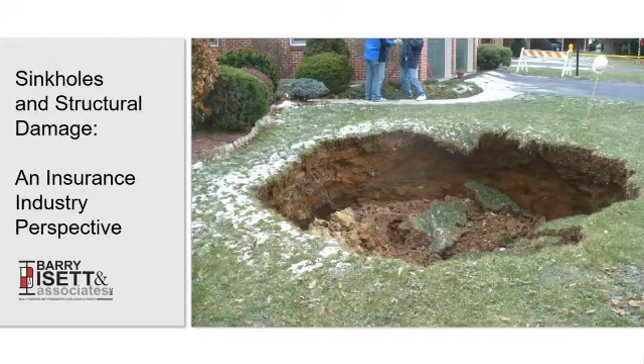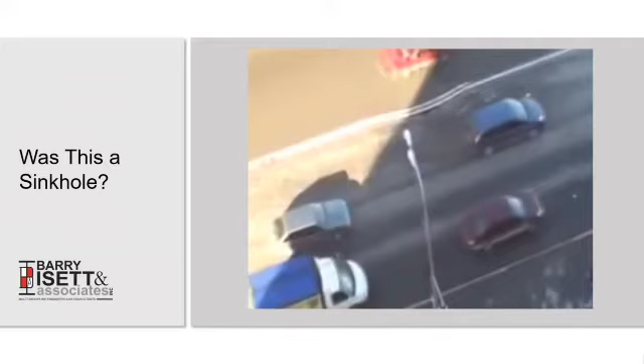The big thing with misinformation is you can see lots of videos and lots of people saying 'this is a sinkhole,' or news reports saying this is a sinkhole, but was it actually a sinkhole? I just saw today on the news in my hometown of Pittsburgh that a sinkhole opened up and swallowed a bus, but was it really a sinkhole? I don't know. We're going to go through a couple of quick videos of some things we see live and in person opening up, and just try to understand: is this thing that's occurring actually a sinkhole opening, or is it some other kind of thing going on?

You can see on the roadway there the depression starting to open up, and the car right next to it very wisely getting out of the way, probably honking its horn to try to get the other cars out of its way. So was this thing opening up actually a sinkhole?

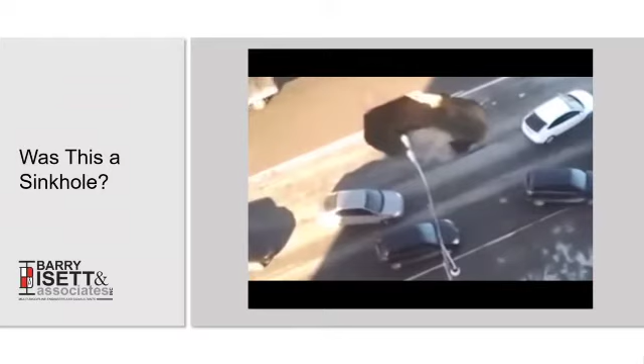We're going to go through some causation case studies later in the presentation to help you understand if these fantastic looking things are sinkholes or aren't sinkholes. The next one we're going to see has a little bit of audio. I hope it comes through, but if not, you can see this was in Baltimore, and YouTube said that this was a sinkhole.

So yeah, between the two of those, one of those was not a sinkhole and one of those was a sinkhole, despite being presented through news reports and online as being actually both sinkholes.

Generally, this is a sinkhole definition that we use. It's pretty important to understand that your policy language may differ from this, but this is the geologic definition, and this is what we've been using for years to determine whether or not we are dealing with a sinkhole or some kind of other subsurface problem, which could be caused by any number of things. So it's the surface expression of subterranean collapse and/or soil movement caused by the dissolution of carbonate rocks such as limestone or dolomite. Some policies may only say limestone, some may say limestone and dolomite, but the big thing is that carbonate rock part.

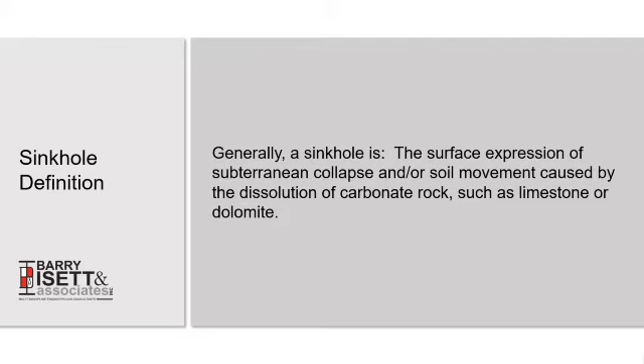So where do we find this limestone and dolomite rock? This is just a map of Pennsylvania, but you can imagine that this extends on down through into Maryland, West Virginia, up into New Jersey, and then some into Delaware. But you can see that there are quite a few bands across the middle of the state.

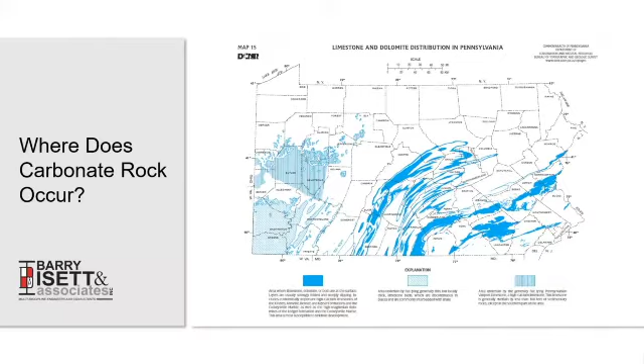You can also see the area I was talking about earlier in Pittsburgh, said to have a sinkhole - that area is underlain by flat-lying, generally thin but locally thick limestone beds, which are discontinuous in places and are commonly interbedded with shale. So in Pittsburgh, it could absolutely be a sinkhole, but it's much more likely to find those kinds of formations whenever you run into the areas where you see the darker shading on the map, which is definitely limestone, definitely dolomite, and usually pretty close to the surface, which can cause sinkholes.

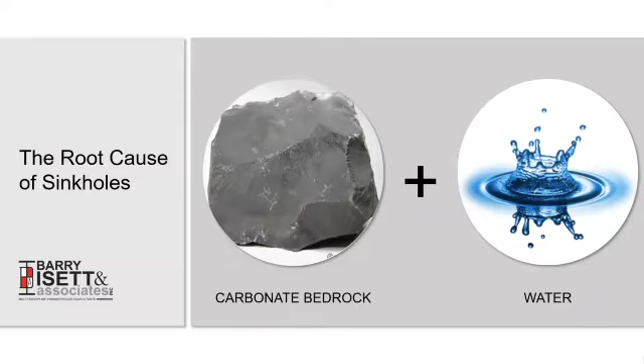So again, what we talked about earlier is the two things you need to cause a sinkhole: first is a carbonate bedrock, that's the limestone and dolomite, but to actually get it to dissolve you need the water - that's what actually opens these caverns under the subsurface. So these are the two pieces we are looking for whenever we're trying to say, okay, what caused this feature to open? First, we have to find out if there is actually rock there, and then we're going to look at what our potential water sources are.

Both of those features can cause water to move through the rock in unique and novel ways and find areas where it might want to pool and start to collect. That's usually where you start to see the formation of sinkholes or caverns - areas where this water wants to pool and collect, and it can slowly dissolve over many years, sometimes thousands of years, to cause openings in the rock surface and then cause the sinkhole on the overlying soil burden.

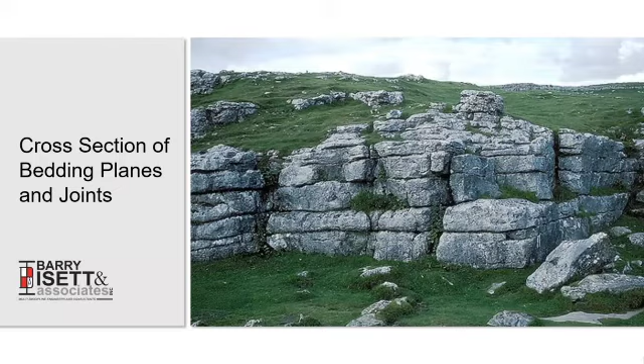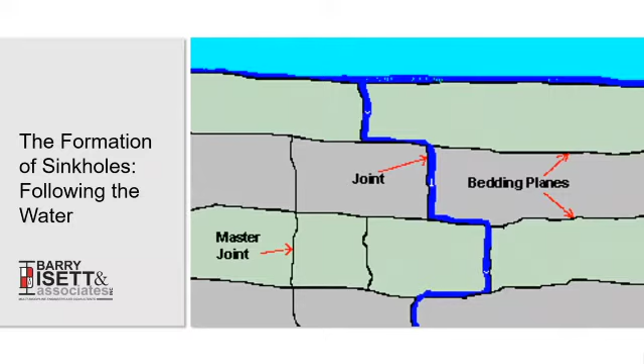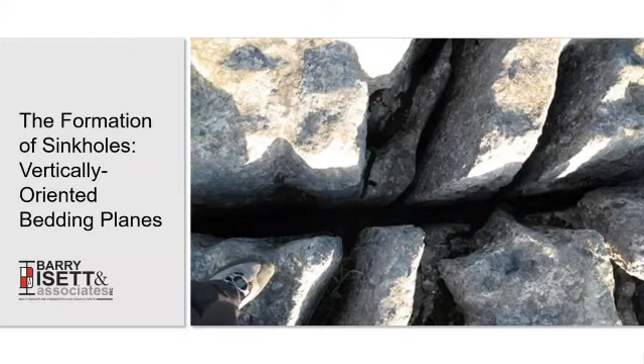So it's not always very simple in which patterns the water is going to find its way down into the subsurface. So you have to be very careful to understand that it's not simple once you get underneath the Earth, which way the water is going to go.

So what is the sinkhole that we see at the surface? The very classic definition where most people think, oh, I know what a sinkhole looks like - that's the dirt that's disappeared into the earth and it opens up that circular depression. And I know what that looks like at the surface. Well, that is what occurs whenever you have soil piping.

But the more sudden event that happens at the surface is soil piping has collapsed the soil down through these networks, through water flow down into that cavern. So that's kind of what we typically see as the end result of a sinkhole. It's not that the soil is the sinkhole, it's that the soil has disappeared down into some cavern feature that has opened up in that carbonate bedrock.

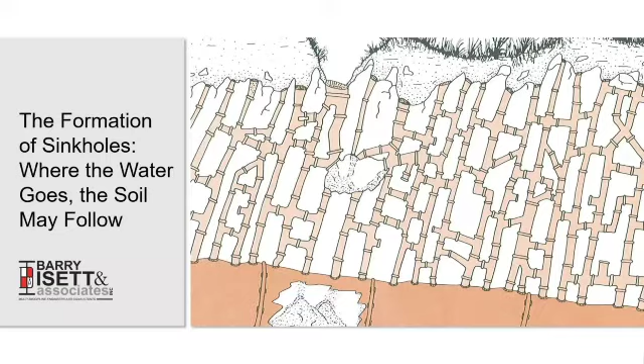And once they start to form, those things are kind of a self-fulfilling prophecy. As they collect more water and dissolve and soil pipe that water down into the cavern, they start to form more of a bowl at the surface. And then when they form more of a bowl, some depression, more water gets attracted there, and it pushes more soil through that soil piping mechanism down into the cavern and makes it even bigger.

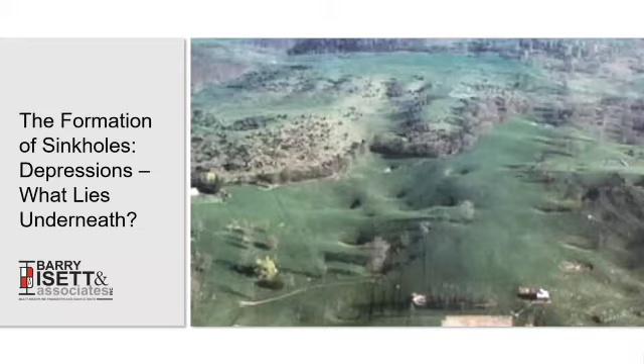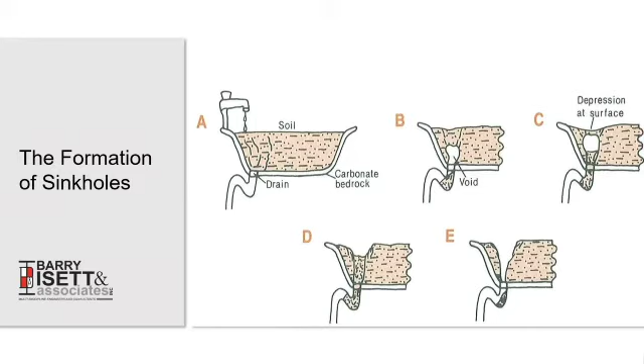Originally there's nothing wrong at the surface, you can't see anything. In B, you start to see a little bit of a depression, maybe something's going on underneath. In C, there's definitely something going on, and this depression is growing quickly. In D and E, that's where you might finally get the insurance claim, I have a sinkhole. So A, B, and C might happen over 3 or 4 years, and then D and E happen suddenly. All of a sudden you definitely have a sinkhole, and they put in their insurance claim.

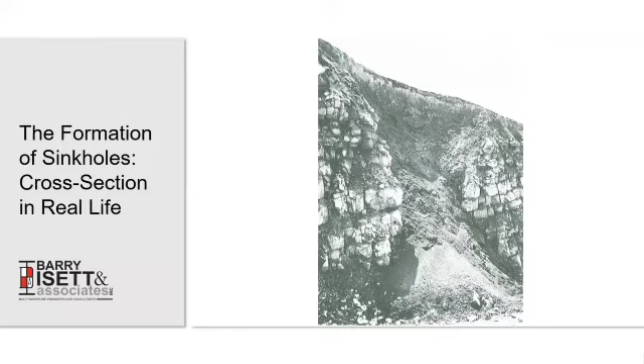For no other explanation, you'll just see an untended portion of a farm field. It'll be nice farm field everywhere else, and then somewhere in the middle there's just brush and maybe a couple smaller trees, and they just don't farm in that area. That could be that there was a sinkhole there and they just weren't able to farm it, couldn't keep the soil to stay there, it was always washing out, so they abandoned that small portion of their field. Something to look around for, especially along the Route 222 corridor or Route 78, those areas are very prone to sinkhole activity.

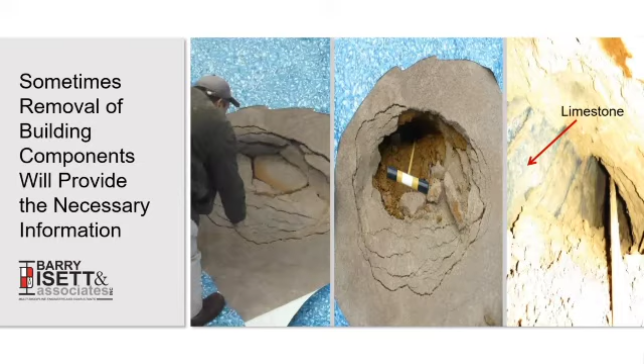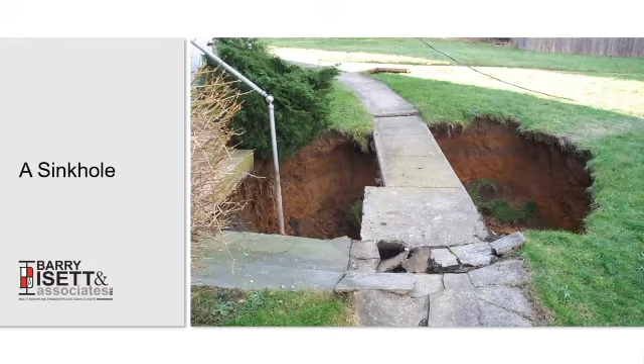So we're going to scroll through a couple photos of jobs that Barry Isett has done over the years, just very classic looking sinkholes. It's really important to remember that not everything looks classic. Sometimes things are hidden, and we're going to get into that a little bit with some case studies when they don't look so classic. But these are some of the worst ones that we've come across over the many decades that we've been doing this work.

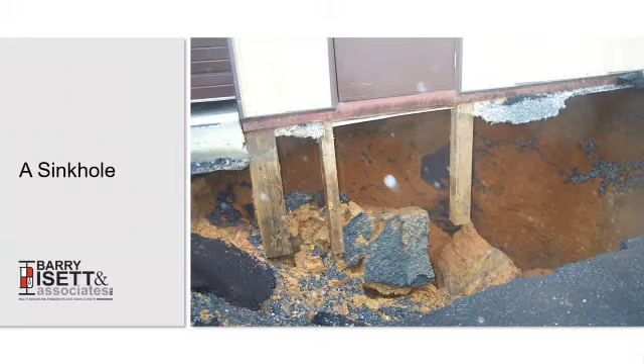Since we started in the Lehigh Valley, we are now an entirely eastern Pennsylvania, New Jersey, Maryland, Delaware company as of now. But we primarily started back in 1977 in the Lehigh Valley. So we've been doing sinkholes for a long time just because they're so prevalent in this area.

This one here was in Easton. Very big loss, lots of different insurance companies involved, and a lot of considerations went into this loss. What caused the water main to rupture? Was a sinkhole first and then the water main ruptured, or was the water main deteriorated and old and should have been replaced, and that's what caused the rupture? And then once that happened, it just exacerbated an underlying condition of a sinkhole. So it's really hard to figure that out sometimes.

You might ask that question of your engineers, your forensic engineers, your geologists and your geotechs, but it's important to remember that causation is a tricky thing when you're talking about sinkholes. It's not always the case where you're just going to find some smoking gun and say, oh yeah, it was the water main that was corroded and that's what broke first.

It's kind of a chicken or the egg argument at times. Another sinkhole we dealt with, you can see the piping on the right. What we found in this case was they had fit all those stormwater pipes together, but never actually finished the glue off. They didn't glue them, just fit them together rough, and it caused one of them to separate and allow water to pour into the subsurface for many years until this opened up.

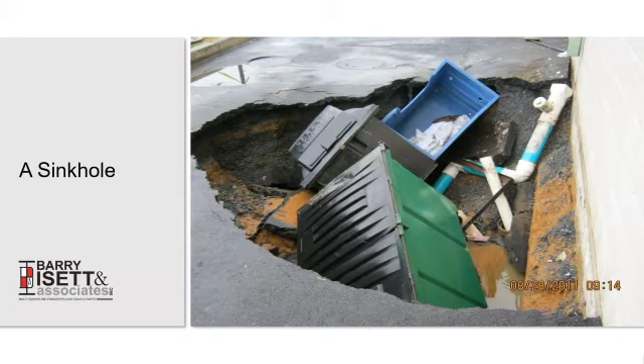All right, so we're going to get into what is the purpose of an investigation. We're going to focus this on the insurance industry, because very often we're asked to do this for private clients who don't have insurance and just want to keep things moving. But in the insurance investigation, most importantly, it's causation first. We want to figure out what caused this, because there's many other things that can cause openings in the surface. Even the ones that I just showed you, they all look very classically like sinkholes, but there are other things that could cause that kind of damage.

Next, we're going to determine the extent of damage. And always, we have to generate conceptual recommendations for repair, because it's really hard for an adjuster to say how much is this going to cost. It's really a complicated subject. It's not as simple as whenever a car hits a building, where you can just sum up the parts and say here's what it costs.

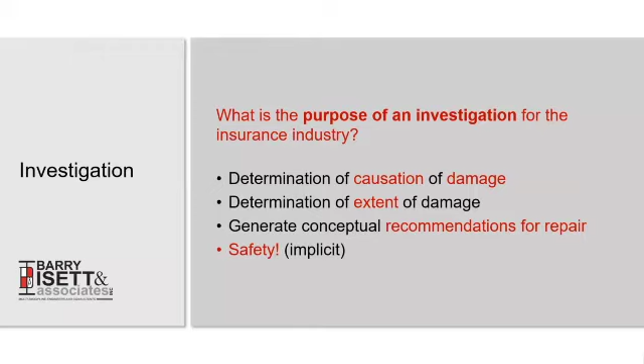And then finally, on any of our site visits, whether it be sinkhole or car impact or whatever, we're looking for safety first. There's been a number of times where I've been put in the hard position of having people have to leave their home—even I remember one I did was the day before Thanksgiving, saying their house was unsafe. So we're always looking towards that, giving the insurance company an added level of security in that regard. It's like when they turn that over to an expert, they're taking on that liability. We usually transfer that over to municipalities, let them know this is an unsafe condition before we get ourselves into the insurance portions of it. So safety always comes first.

So here are the components of the investigation. This is why it's important to consider what expert you're hiring, more than just one structural engineer, because reviewing site geology and site history is something that, even though I am very experienced and have done this for more than a decade now, we do want to have that geologist be the person who is the expert, and they can bring that expertise to say whether this is actually sinkhole territory or not.

Is this rock actually part of a condition that could cause a sinkhole, or is it not? Having that expert handle that piece while I handle the structure is a really big asset to have, especially if these things end up in litigation, which, given the costs of repairing some of these, sometimes they do.

Next, we conduct a site walk to observe the actual conditions. And then finally, sometimes that's not enough. We didn't get enough information from the surface, so we need to go subsurface. We'll get into some of those, but they can include an excavation, geophysical survey, or an actual geotechnical boring to get under the surface.

So first step is doing the geologic history and sinkhole maps. There's a lot of limestone and carbonate rock maps. You can just pull up these maps and look to see where they end and start.

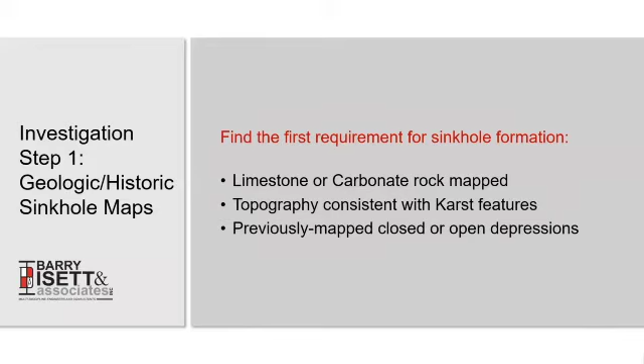When the underlying rock is mapped, it's not exact, there are lines drawn on a map, but it is so close that, I'll show you on the next slide, you can see that subject site in the top left corner. Within a block or two blocks, you go from one formation to another, the Rickenbach, and then finally to the Allentown formation. So it's amazing that within a couple blocks these things can change.

That's why it's important to have an expert who can not only see those maps, but understand the significance and the tolerance on those maps. Because it might be so close that they understand we can't pinpoint it, and we need more information to understand what rock is underlying this.

Another type of map devised in the early, I think, 40s and 50s is called a historic sinkhole map. A geologist took all these aerial photographs and just mapped closed depressions. If you remember that aerial photograph of land where I was pointing out the depressions, that's basically what he was doing, actually mapping these things out.

So these maps exist, and correlating them with your site can help you understand how many closed depressions there are and how prone this area is to sinkholes. Because it's not just one thing to have sinkhole prone rock, you have to actually prove that closed depressions and sinkholes actually do open up in this rock. Sometimes rock is so deep that it just doesn't open up.

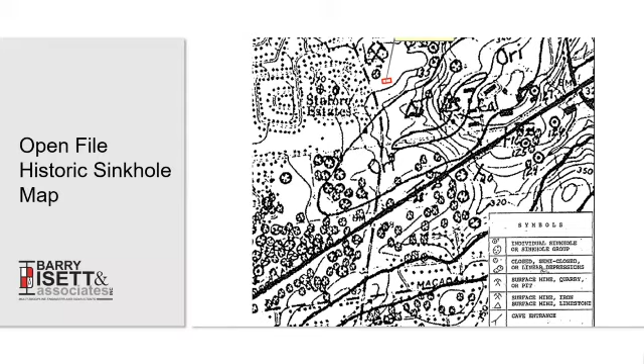After you've done the site geology and the sinkhole history, you can take into account any other history that an owner might give you. Was there any mining in the area? What's the chronology of events? What happened on this site? Just gather up that information, because sometimes it's very important to understand what was done.

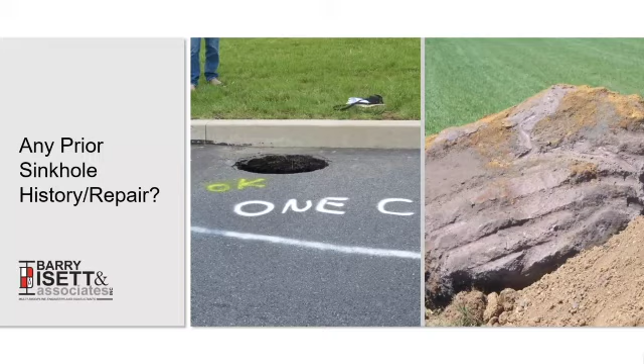For example, you can see on this site there's a one-call marking. What was that marked out for? You might get some information from the homeowner, like, oh yeah, they just dug a new sewer across the way, or they just changed the stormwater basin. That might have redirected some water more toward that area. It's important to consider those things, even though they may be hearsay, but you can keep them in your notes as a reference as you look around the site for more information.

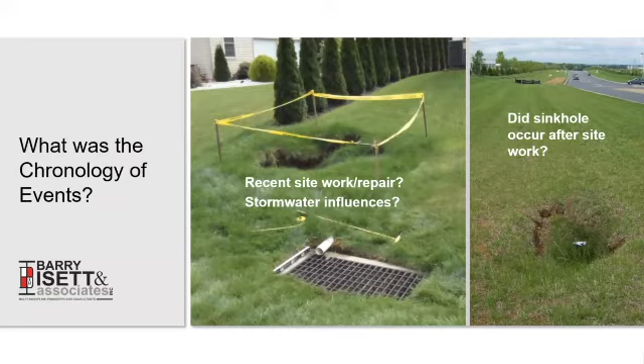As I said earlier, was there recent stormwater work? That's very often the case. Stormwater changes across a site can cause big problems down the line. So always try to gather that information. Did they put in a pool? Did they change the stormwater? Did they do repairs in the street? Was anyone working in the street? Did your water shut off, or did anything happen like that? It's important to keep in mind as you do the investigation.

After you've gathered the information from the maps and from the homeowner or any relevant party, the next part is the visual observations. This is a site visit to come out and see if this is actually surface subsidence or if there's a deeper issue. So we're always looking for correlations between structural damage and actual subsidence.

We're also always looking for that source of water, because it could be as simple as just water running off the side of a driveway, but it could be as bad as them having a pool that opened up and allowed a bunch of water in to make the situation worse.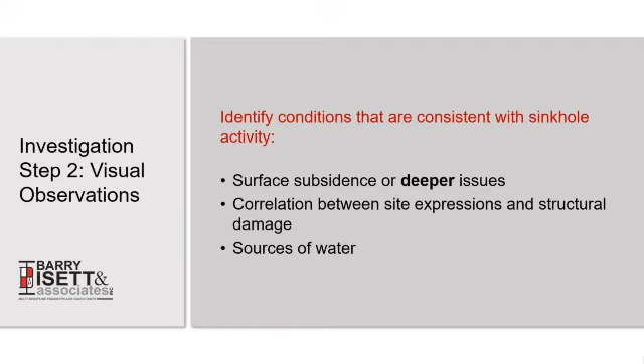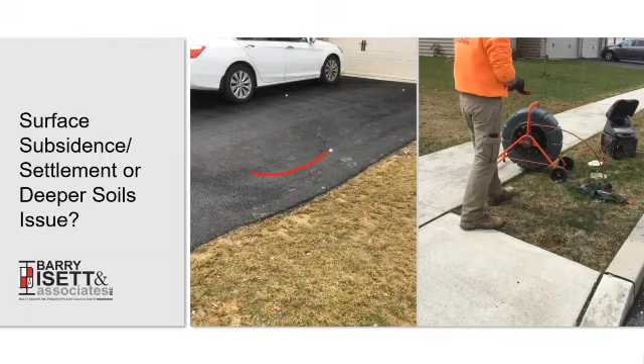Here's an example: is this a deeper issue, or is it just surface settlement after construction? You can tell by the look of the driveway that this home is not that old. Whenever you see a home of this age, you keep an eye out for things settling after construction, like excavation around the house or trenches. You can see on this one there's a linear depression trending in a line across the driveway.

We thought, that looks a little too convenient that it's in a line. It's not very often that sinkholes open in a linear fashion. Typically they open in an hourglass shape, and at the surface you see more of a circular pattern.

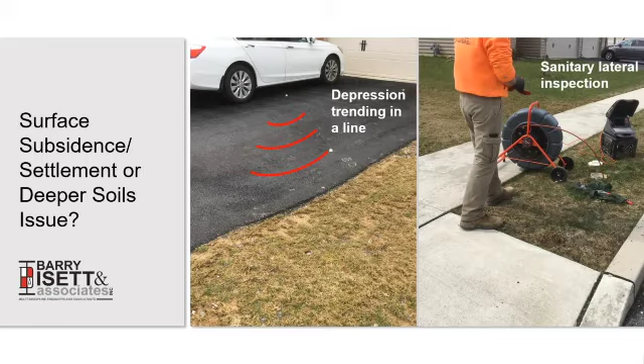So we decided to camera it. You can see on the right we have a scope camera that can inspect the underground sewer line — that's called a sanitary lateral inspection camera. In the next slide, the photos show that sanitary line trended right in the direction of that depression.

But inside, the sanitary line was in completely good condition — nothing wrong with it, no water going out. So it was confirmed that this was just the trench dug for that pipe, which they backfilled without compacting the fill enough.

In a new home, you can expect this to settle a little bit over the course of 3, 4, 5 years. That's what this homeowner was dealing with. So this was not a sinkhole.

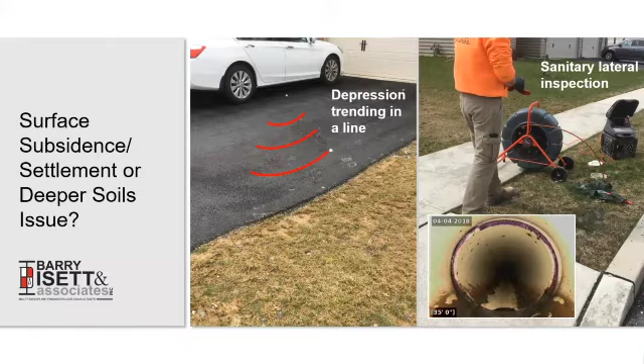Another question we ask when looking for whether it's surface subsidence or a deeper issue is: what is the volume of soil loss? If it's just a small amount of soil loss, it could just be that the soil is compressing.

In the case on the left side, you've got one sidewalk panel settling 1 inch. That's easily explained by the area being backfilled without enough compression, which then compressed slowly over time.

On the right, you can see that's 3 inches, and it's a whole garage bay. You can imagine that would take a ton of compression to actually make that happen, which isn't something that would normally happen in a garage.

Especially that home on the right — I was the one who assessed it. The home was built in 1985, had undergone no damage, and all of a sudden we have all this fresh damage in a whole garage bay, sinking 3 inches. So even though we didn't have that classic circular opening on the surface, it was clearly a sinkhole.

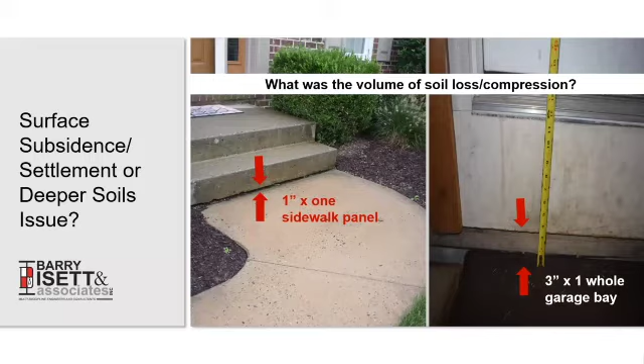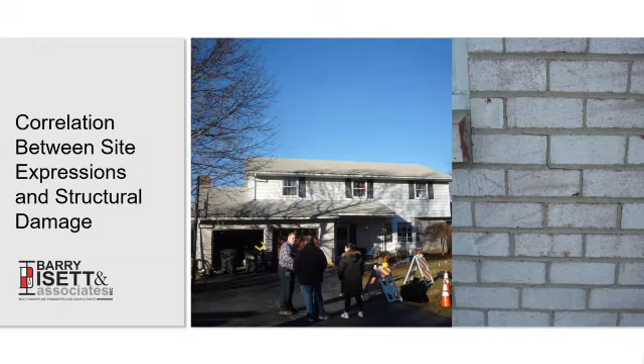We sometimes look for correlation between structural damage and what we're seeing on site. You can see in this one where that arrow is, matching how the other picture was taken, and that arrow is chasing back towards the house — that's the direction the hole was chasing.

When you look down in that hole, it wasn't just going straight down — it was actually arcing towards the house, towards the garage. Then on the rear wall of the house, there's a crack on the far side of where all this movement and soil damage is concerned.

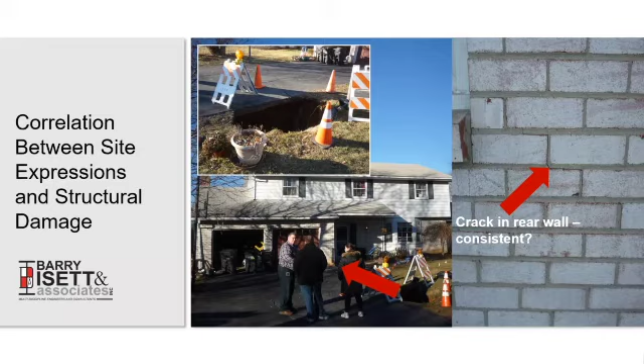So was this consistent? Was that crack consistent with damage going on at the front left corner of the house and this crack at the right rear corner of the house? We called that not consistent.

So it's important to draw the line somewhere and say what was actually damaged by the sinkhole, rather than finding every single crack in the home and attributing it all to the sinkhole. It's important to figure out which way the subsurface damage is going and try to correlate that with what's happening to the structure.

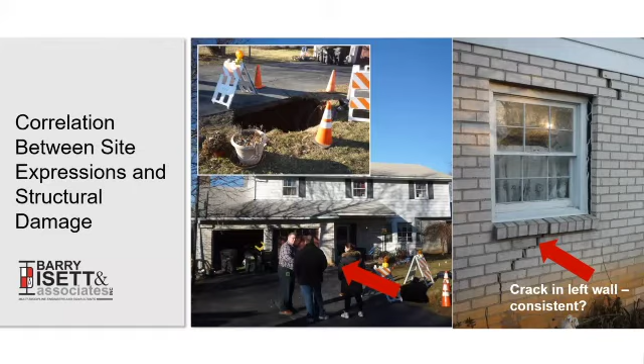So again, we're always trying to look for the water and the natural way that water is going, whether it be through natural features, stormwater runoff, or through utilities and grading. Any way that, like a utility exiting the house, the sanitary lateral, every time they flush the toilet or take a shower, if that is broken, that could be a problem. So that's why we try to camera those. If the roof leaders come off the house and go under grade and we don't know where they come out, that's an important thing to look into.

It's really hard to say what the cause of the sinkhole is 100%, but water is always going to be a contributory factor. You might not always be able to identify exactly where the water was, but it's a good process to keep that in your investigation, not just think of it structurally and have a structural engineer identify the 5 things that were damaged on the site.

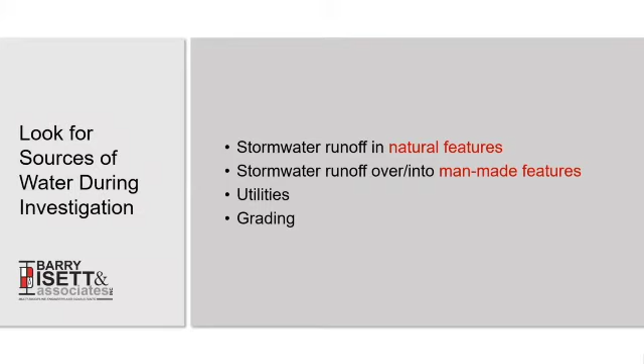So here's a case where a sanitary lateral is broken and just voiding out the soil for probably many months before it was discovered. So that's a case where investigating that was important.

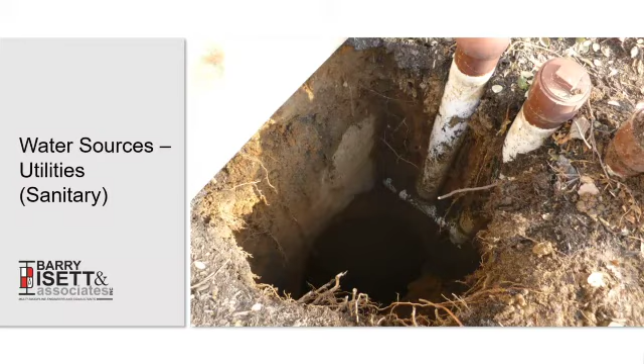So different sources of water and what they can cause, and whether one's accelerated settlement or one is severe soil loss, is kind of the difference between, is this actually a sinkhole, or is this actually just settlement of soil that would happen whether you were in sinkhole territory or not.

On the left, you can see that water discharging from the roof leader is in that one zone. And even though it is a little depressed there, and you can see that soil probe just goes right into the soil very easily, it's not a sinkhole unless it's actually opened some kind of cavern in the bedrock, and then that soil has disappeared. This is just some settlement that's going to be accelerated by the water that's in that area.

Whereas on the right, that's not settlement, that is loss. Like that soil had to go somewhere to cause that damage. So the difference between the two of them is pretty important.

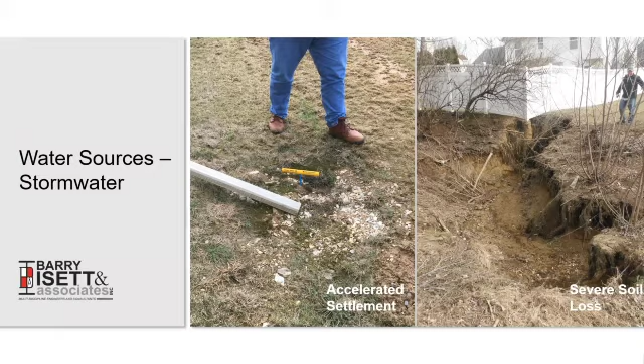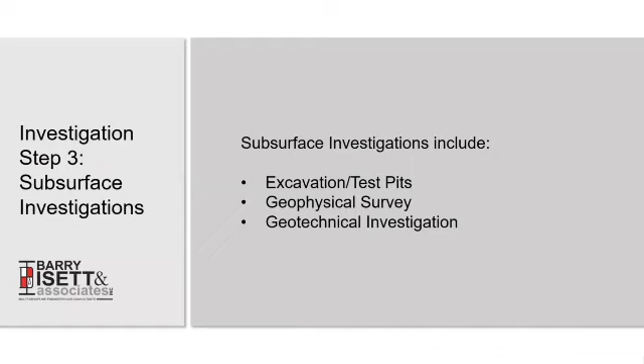So the last investigation step we have is subsurface investigations, whether you're actually probing the subsurface with an excavation or a geotechnical boring, or you're doing non-destructive, non-invasive testing like geophysical surveys. So we'll start with the excavation and test pits and why they can help you understand what's going on.

This wasn't an actual excavation, it actually just looked like this when we showed up to the site visit first, but it's important to understand that not everything that looks like a sinkhole is a sinkhole. You can see that on the left, whenever you first show up, it kind of looks like a sinkhole. It's very round at the surface.

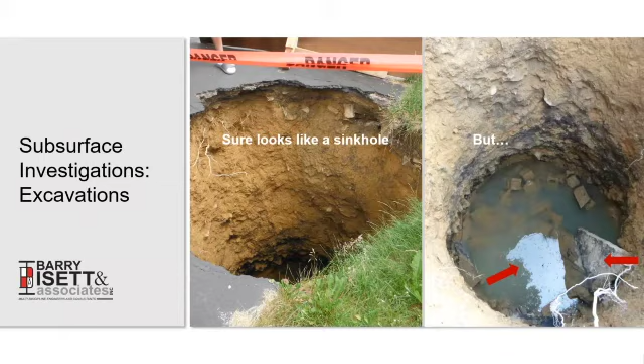But whenever you look a little further down into there, you can see that there's water standing in the base of the trench, which is kind of weird, because water doesn't normally sit in a sinkhole. Normally it's washed out the soil and caused that issue to form in the first place, so the water would just go. And then also there's a structure down there, and this was a roof of an old cistern. So sometimes these old cisterns give way and they really look like a classic sinkhole, but they are not. They are just a collapse of a subsurface feature, which would be a man-made feature.

So here's another one. We had a 3-foot wide depression with soft soils in that area. And we were wondering, wow, it really looks like a sinkhole. It's right in line with the sanitary line. Maybe the sanitary line's cracked. But we said, let's do an investigation a little further before we call it a sinkhole.

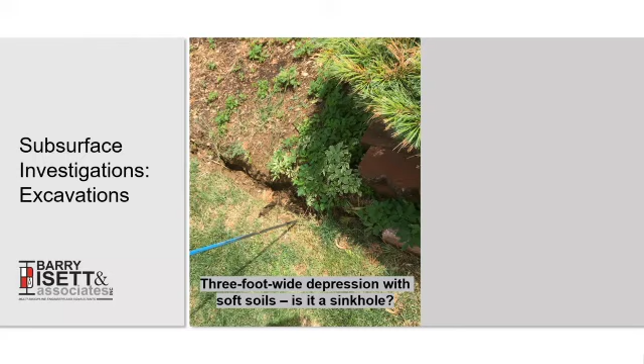It was in sinkhole territory. So we decided, insurance company agreed, let's do a little excavation, let's see what's going on. And what it turned out is it was an abandoned septic tank. So it had all the characteristics of a sinkhole, but we just did a little bit of an excavation, and turns out it wasn't. It was an abandoned septic tank that just never got properly filled, and then it collapsed.

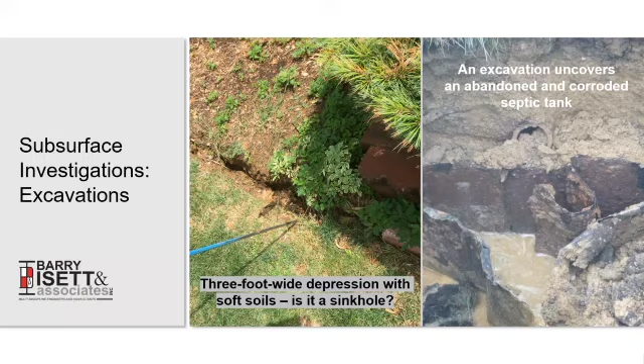Another one, which looked very classic, like a sinkhole. I mean, that last one, maybe it didn't look like a sinkhole, but this one, you show up to a site and it really starts to look like a sinkhole. You got an open void.

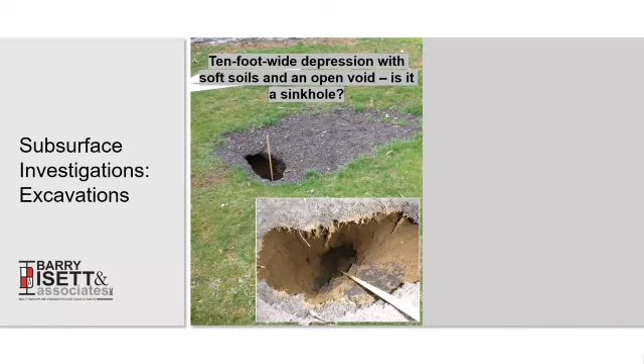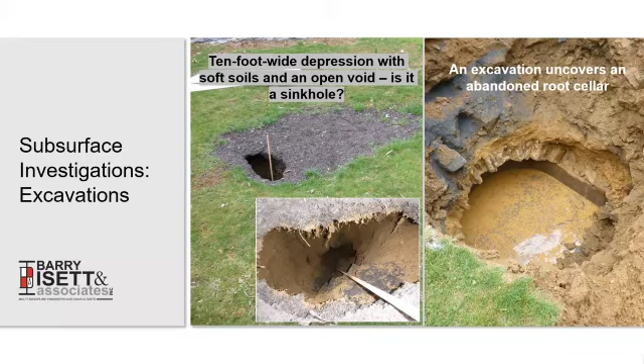It's like chasing down into the rock. Like, what could this be other than a sinkhole? But once you did an excavation, it uncovered an abandoned root cellar whose roof had collapsed, pulling soil down with it, and that was what was going on with this one. So things that look like a sinkhole, if you just do a little further investigation and spend more time on the case before trying to close it, you might figure out they're not actually sinkholes.

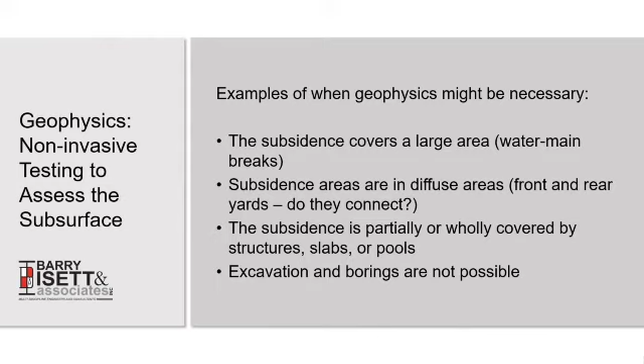So geophysics is just non-invasive testing. There's many different ways you can perform geophysics. We'll cover a few just to give you an idea of what they might be used for. The main reasons we use geophysics are because we're not able to get enough information from the subsurface - maybe it's covered with structures, slabs, pools, things that are completely obstructing the view. Another reason is the subsidence covers a very large area, maybe the front, back, and side of the house, and you're trying to understand where the actual root of the problem is. And sometimes we might want to do borings or an excavation, but it's just not possible for access - you can't get the machinery back there. So geophysics can help with those cases.

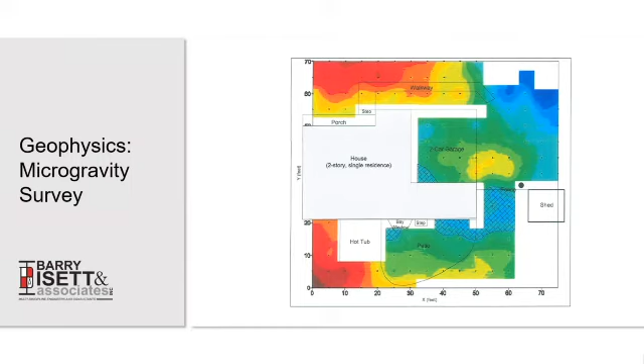It's always important to correlate that with other types of investigation. It might not be that microgravity says there's a void underneath - it could just be that the rock is very steeply dipped, and rock weighs more than soil. So it's important to keep in mind that one type of geophysical survey alone isn't good enough - you want to correlate it with others, like seismic refraction, just to understand the level of the bedrock. That might be another method that could be used.

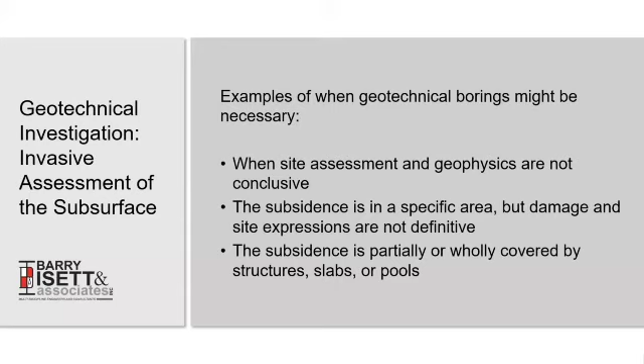Another subsurface investigation we can do is geotechnical borings. Some examples of when that might be necessary: whenever geophysics are not conclusive - very often you think you're going to get really good information, but it's kind of contradictory, so it's important to confirm with boring information, what they're seeing out there. Sometimes the geophysicists really like to see that - they like to understand where the borings return certain information so they can refine their data. Another reason is if the subsidence is in a specific area, but the damage and site expressions aren't definitive - you have stuff that might be old damage or new damage, or it could be multiple causes. And another reason is if the subsidence area is completely covered by slabs, structures, whatever - you can do a boring and get more information.

It's really important to remember that whenever you're doing these borings, the information you get is going to be very precise - you're going to know exactly, was it voided, what kind of soil was there, what kind of rock was there. But you're looking through a pinhole - you're looking through one specific point, and maybe up to 3 or 4 depending on how many borings you get in, and those are just in those locations. You could move 10 feet to the left or right and maybe it's very different. So it's important to know that won't always get you super definitive information across the entire site.

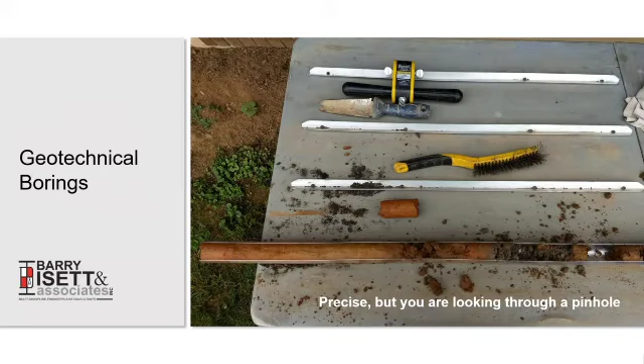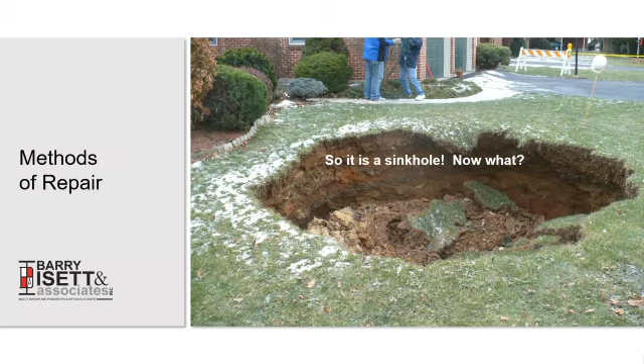All right, so you've got a sinkhole. Now what do you do? Pretend we've been through all that, and yes, it's a sinkhole, and yes, it's covered. These things can cost a lot of money, so you don't want to start throwing money down the hole until you take care of it. You want to understand as best you can the extent of the damage and how much you have to do to repair it, which is a complicated thing. This is where the importance of that team approach I mentioned earlier really comes into play.

It's really good to have not only a structural engineer, but a geotech and a geologist, at least on staff of who you've hired. Maybe you can just send out one of them, but they have to have those extra resources. A great example of this is a non-mutual insurance company claim where they had hired a geologist to come out and determine if there was a sinkhole.

The geologist did a great job in geology. He came out and said yes, it's a sinkhole, and here's how you repair the subsurface. But he didn't really assess the structure well enough. When they got into repairing this sinkhole, the contractor got about halfway through and said, hold on, something's wrong here, insurance company - the structure is really damaged, really bowing. So the insurance company contacted us and said, yeah, we're sorry, we messed up on this one. It seems that we didn't get a structural engineer to review the structure.

They asked us to go out and take a look. It turned out that the wall underneath the sinkhole had bowed to the point where all the wooden joists that were pocketed into this masonry wall had pulled out of the wall, and the bedroom in which their insured were sleeping was completely unsupported. The joists were basically sitting on quarter-inch thick Luan panels. That's what was holding up their bedroom, and it was amazing it had stood until then.

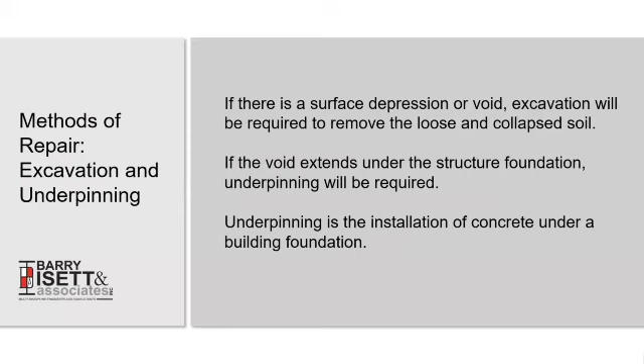Backfilling an area when you're done is one of the big important things, which is why it's important to have that team in place. I've overseen a lot of structural repairs, but as far as backfilling repairs, it's really important to have that backup of a geologist behind me who understands the proper way to do this, because as you dig down you might see different things that make you think about the right way to repair this. Backfilling, the way we do it at Barry Isett, is using native soils that have enough clay content to shed the water. Then we use a bentonite clay - it's a desiccant that sheds water even more, decreasing the permeability of that soil and limiting water from going back into that zone.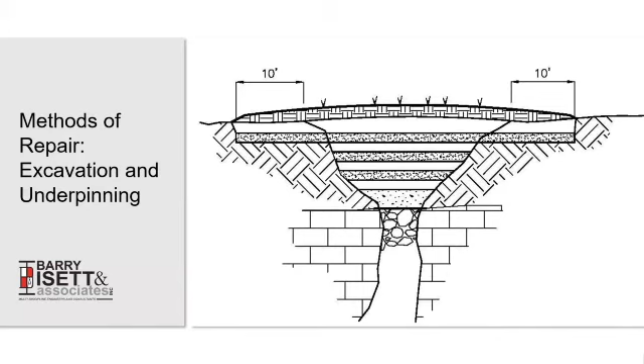That would have been the sinkhole. You dig down, find the root of the cause, and then just repair it, kind of like tooth decay.

Here's what it looks like when you're mixing bentonite in with the soil. It's not a lot of it, but it's that white substance, and it helps prevent water from being so permeable right through the soil and going right back to the root of the problem again.

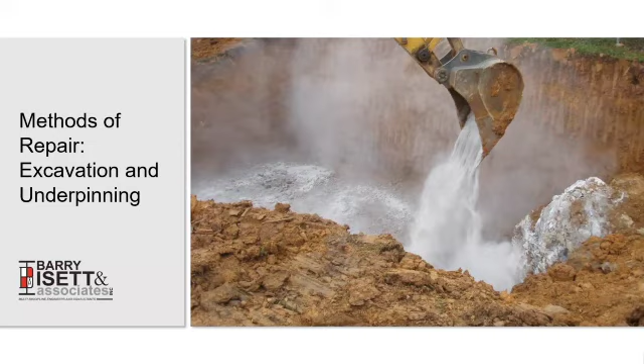Another method of repair is pressure grouting. Whenever you're doing the surface repair and it's not too close to a residential foundation or it hasn't caused structural damage, that's fine. But if it's really close to the foundation or it's caused structural damage, it's really important to consider this as a repair method.

What pressure grouting does is it improves the soil bearing capacity. It consolidates loose soils and it stabilizes and supports foundations. But it's really important that even though it seals channels within soil and rock, it's only doing so right at the point that they've drilled. So really what we're trying to do is stabilize this soil and pressurize it to re-achieve the normal bearing capacity of that soil from the rock up.

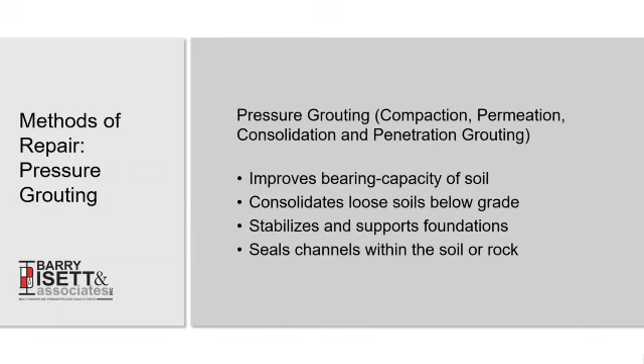With a big water source like the pool, you can't really leave it to chance and say, oh, I think it'll be fine, it's not going to open up again. With that much water there, it's a very big potential to cause a little bit of depression, open up the liner, and collapse again.

So here's a cross section of what pressure grouting looks like. Each of these zones, I'll point with my arrow again, is where the drills would have gone down. You can see that when they inject the grout, it causes the soil to push outwards and creates these bulbs of grout pushing outwards. This whole hatched area above is what we're assuming is the improved soil bearing zone, helping the foundations above bridge any gaps that might be in the rock below.

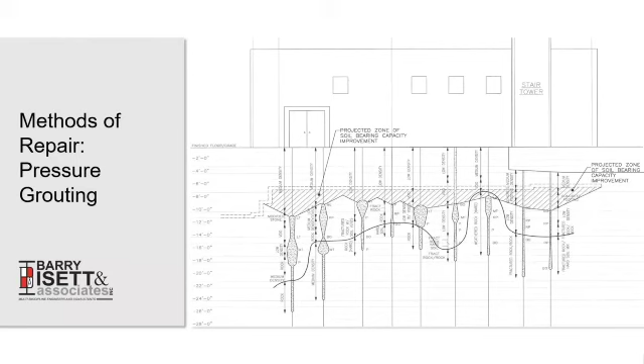Very often we're involved in cases where they tried to repair it without an engineer involved once, tried to repair it without an engineer involved twice, and we're out there for the third time, and it's really costly for insurance companies to go through that cycle.

So one of the most expensive and complicated repairs that we could go through is micropiling a house.

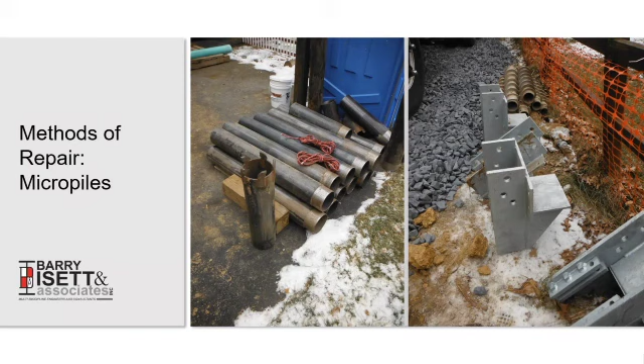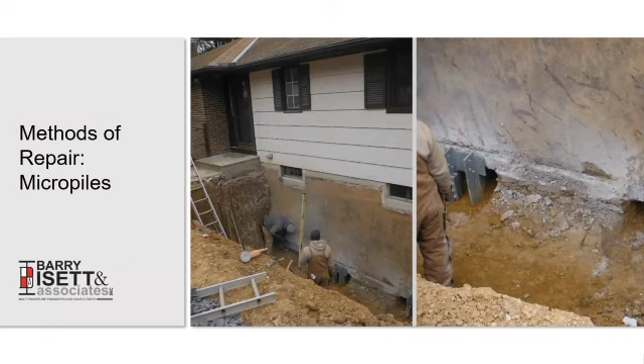We don't often get to this level because it is pretty expensive, but sometimes sites are so sinkhole prone and so problematic that this is what it takes. Brackets get clipped to the foundation of the house, and pipes get drilled down into the surface until they reach bedrock. They cut off the toe of the foundation, install the bracket, then come in with their rig and drill down onto bedrock. That bypasses the soil and allows the residence to be supported by those piles directly.

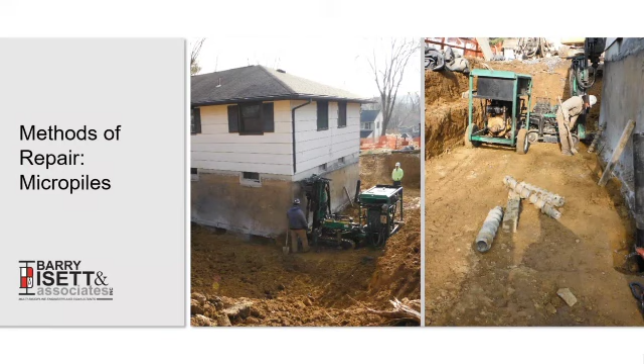Another method of repair, used on almost every job, is cracking in a foundation wall. We do want to support the soil, but the cracking needs to be taken care of. If it's a quarter inch wide or so, usually those can be epoxy injected, which makes it even stronger than it was before the crack occurred.

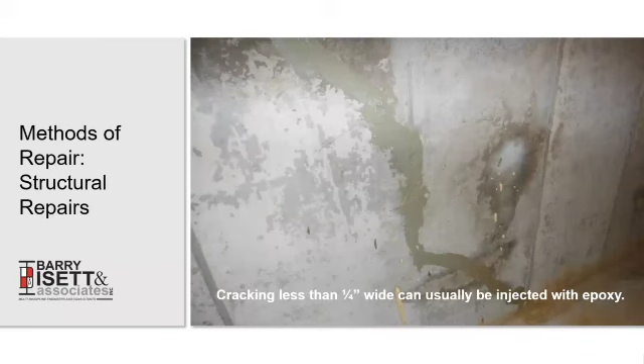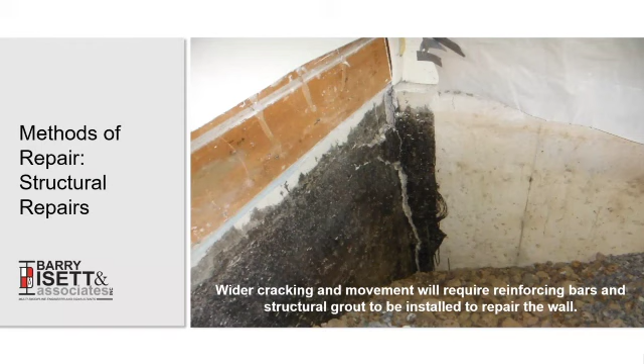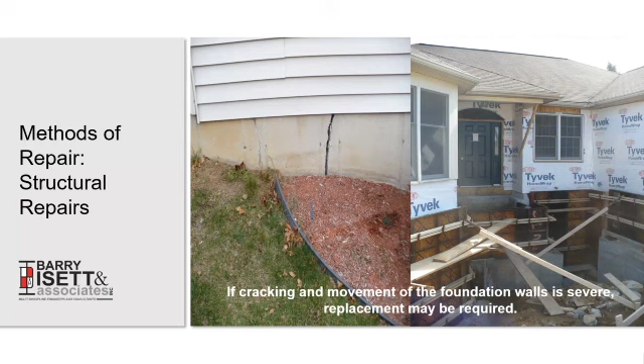Wider cracking might take some reinforcing bars, like at this corner where a big crack has opened up - that might require cutting out a piece and installing reinforcing bars across that joint to stabilize the crack before it gets reformed and poured. Structural epoxy won't work on a crack that's too big. That involves cutting out pieces of the wall, pulling those down and replacing them, so it can get pretty extensive depending on the amount of movement seen.

In addition to all those repair methods, it's really important to remember, even as an insurance company not covering these things, to convey to your insured the best practices to prevent future sinkhole openings or future problems. That all leads back to the first thing we talked about, which is water.

You have this carbonate rock - we've already determined that at your site - but the last thing it needs is more water to form a sinkhole. So you're taking care of all your water-bearing underground utilities: water laterals, sewer laterals, roof leaders. Make sure they're intact, convey to the insured or test that, make sure they get camera surveyed, reroute rain leaders away from foundations, regrade slope away from foundations, and slope impervious pavements away from the structure - just getting that water to be somewhere other than right underneath their residence.

Those are really good practices to keep in mind as you wrap up these claims, to convey to your insureds: look, we've been through this big costly repair, it was probably a big headache for them, it was a big headache for us, here's some best methods to prevent this from ever happening again. A lot of times those things just get brushed over, and it's really important to keep them in mind going forward with these claims, finding some way to convey that to the insured. We always include that in our reports as a really important way to say, okay, this is how you prevent this from happening again in the future.